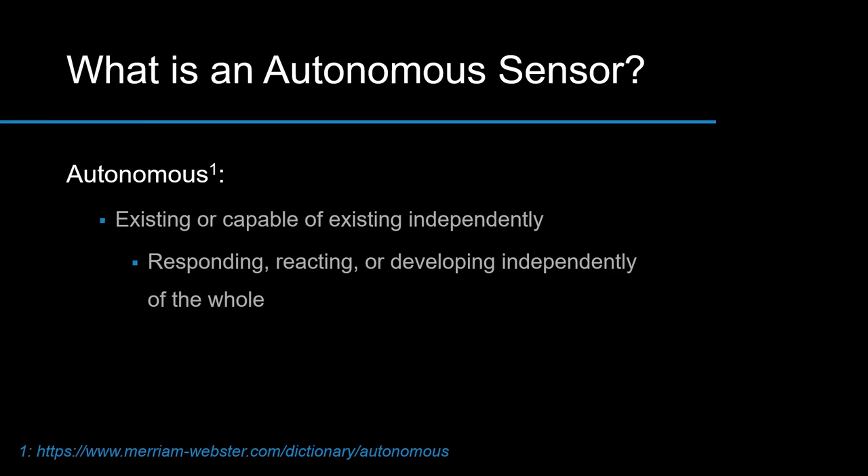Thanks, Antonio. Yes, so let's unpack that. Merriam-Webster describes autonomous as existing or capable of existing independently. So what does that really mean? It's the ability to have control over decision-making based on a variety of input factors. So you have the autonomy to decide, after you wake up, am I going to brush my teeth first or go eat breakfast first? Making simple decisions like that.

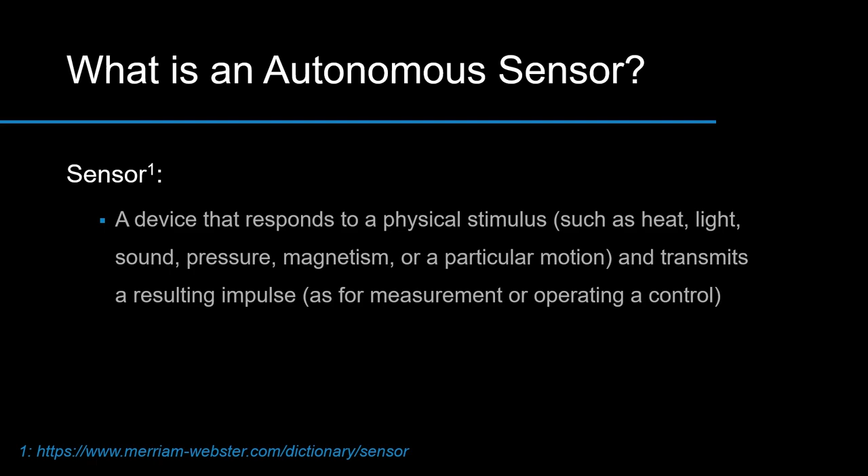Now, what is a sensor? Merriam-Webster defines that as a device that responds to a physical stimulus. So what is a physical stimulus? It can be any kind of input like heat, light, sound, pressure, and you can use sensors to pick up those things. Like my mic is picking up the sound of my voice. Your eyes are picking up the visible light around you. A thermometer senses change in temperature, things like that.

So what is an autonomous sensor? We define that in our group as a sensor that responds to physical stimulus and then can make a decision about what to do about that physical stimulus. That's how those two parts of autonomous sensor work together as a system.

So now we have an idea of what we mean by autonomous sensors. Another word for autonomous sensor is robotics, which you might be familiar with, or intelligent systems, or uncrewed systems. They're in our everyday life. Just real quick, how many of you came in in a Tesla? So you've been exposed to autonomous robotic technology already, with the self-driving, the driving assistance and autonomous driving capabilities.

And if you've been out to San Francisco lately, you've probably seen the Waymos driving almost completely autonomous. And if you've been on an airplane lately, some portion of that flight has been performed with autonomous technology, think of guided navigation, autopilot. The airline industry is even developing and testing autonomous takeoff and landings, so be on the lookout for that.

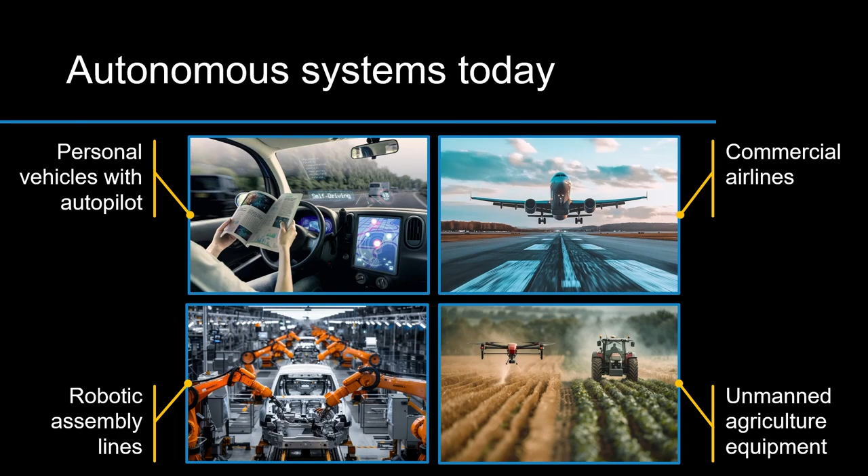But not all technology is the same. So for a more in-depth explanation, I'm going to turn it over to Brian. Thank you very much.

So we talked about what autonomous sensors are, how we define them, and gave you some examples of different types of systems that you interact with in your everyday life today. But why do we care? Why do we want to develop them? Why do we want to use them? That brings in the concept of the 3 Ds of autonomy. So the first D in the 3 Ds of autonomy is dangerous.

So these are tasks, pretty self-explanatory, that are dangerous for humans to do. The goal would be to increase the standoff from that dangerous item. So we can use drones remotely to go and look for things that might be dangerous for humans to be close to and interact with. We can even have them potentially interact with the dangerous item, again allowing the human to be much further away.

Another type is dirty, and this can range from all different types of stuff. This could literally be something that you're going to be in the dirt, so agriculture is a great example. Maybe you don't want to be in the field around dirt, or potentially dirty and dangerous things, like spraying fields. Pesticides and stuff have been known to potentially have effects on humans. So we can use autonomous systems and sensors to remove humans from having to interact regularly with something that is considered dirty and potentially dangerous.

And then the last one is dull. These are things that we don't want to do as humans, things that are just honestly annoying, which autonomy is great at replacing. Driving is a great example, as Antonio mentioned. Driving the car is not exactly a fun thing. Maybe some of you will be getting your driver's license soon, and it seems fun, but after about 10 years, you'll probably realize it's not all it's cracked up to be. So this is a task that we can easily replace, and you're seeing that today.

The way we're leveraging AI and teaming is that the 3 UAS actually have control algorithms in place that tell them to stay in this specific chevron formation, a V formation, and precede the vehicle at a set distance. So you can see as it makes the left-hand turn, the aerial vehicles are swinging around to stay that set distance in front of that ground vehicle.

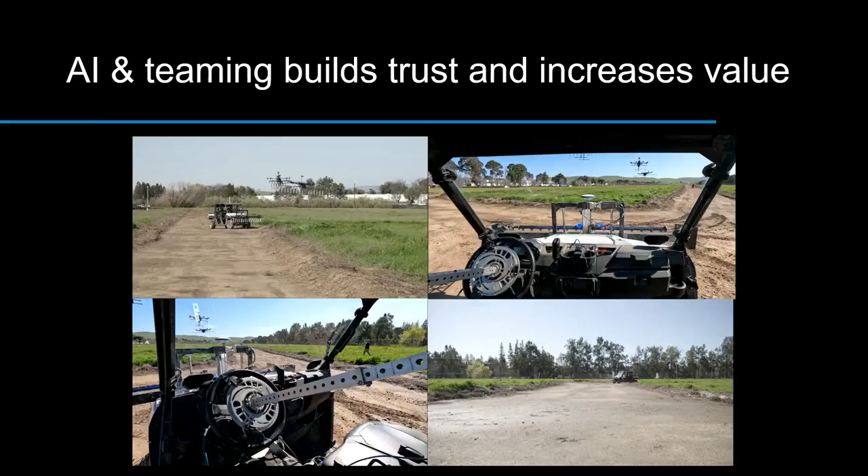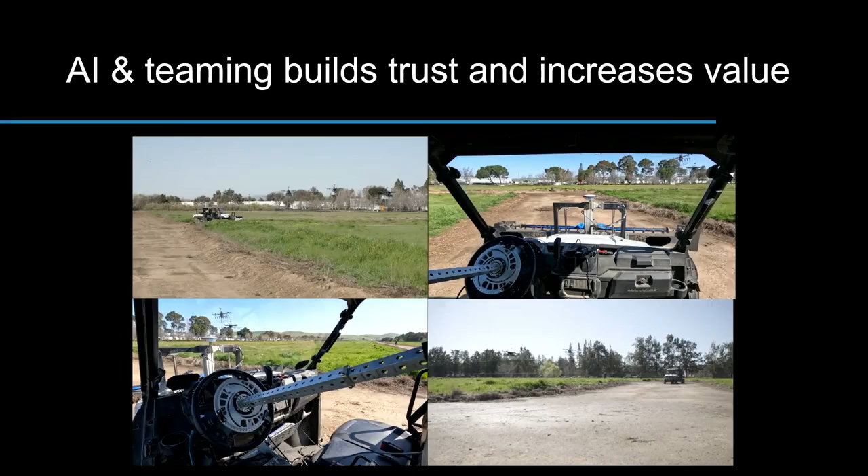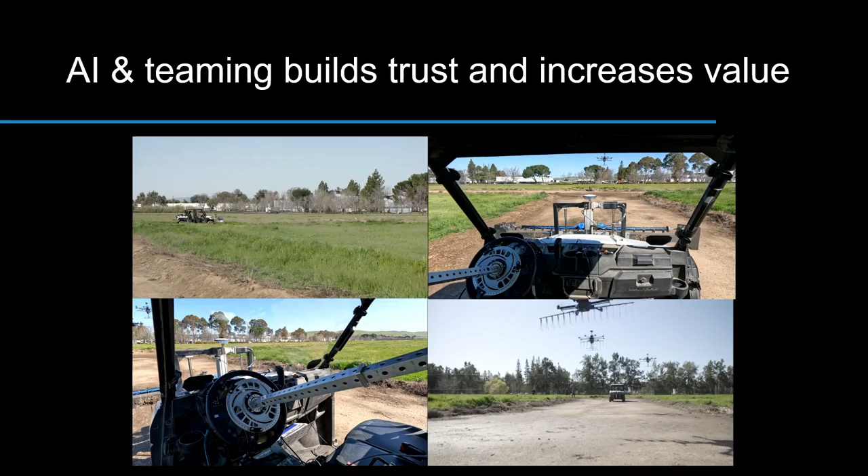Another fun thing about this ground vehicle: what's enabling an operator to have remote control of this vehicle is that we are mapping controls to the brake and the gas pedal, as well as the servo motor on the steering column, so that you have all the same functionality as an operator would that's in the vehicle, but with this safety standoff. So the value added here is that what would take 4 highly skilled operators now only requires 1 operator who is at a safe distance standoff. Hopefully that highlights the value added of AI and teaming.

Right, so now we've talked about what an autonomous system is. We've defined it, and we've talked about kind of the value of it. But now we'll shift onto the sensor side. So what are sensors, and how do they work?

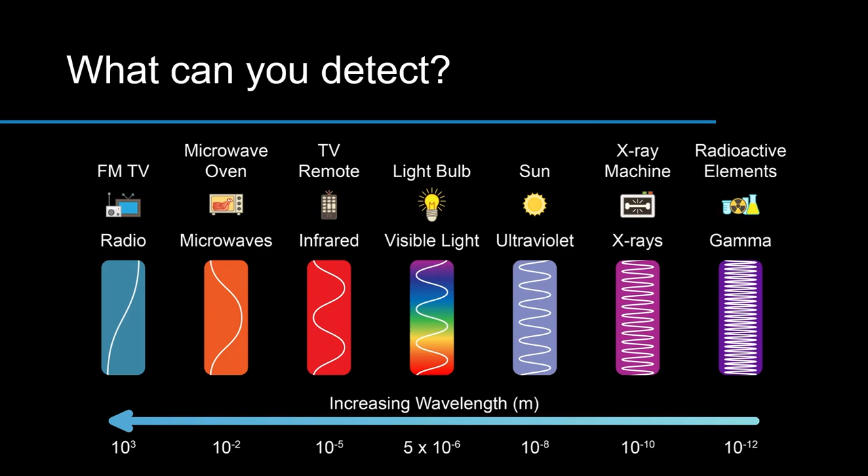And then as we push even higher frequency, we get into things like X-rays. So any of you guys have been injured, had a medical procedure, or had a broken bone are probably familiar. This is what they use to do medical imaging typically. And then you push even to higher frequencies, which have very specific use cases in the gamma band for nuclear type operations.

But focusing on visible light to really hit home how we use the spectrum, it's something you guys use every day, again, is your sight. So your eyes are sensors that are very sensitive to this band, denoted by wavelengths of 700 nanometers up to 400 nanometers. And that's how you perceive all the different colors of the rainbow, with red being a much lower frequency and violet being a higher frequency.

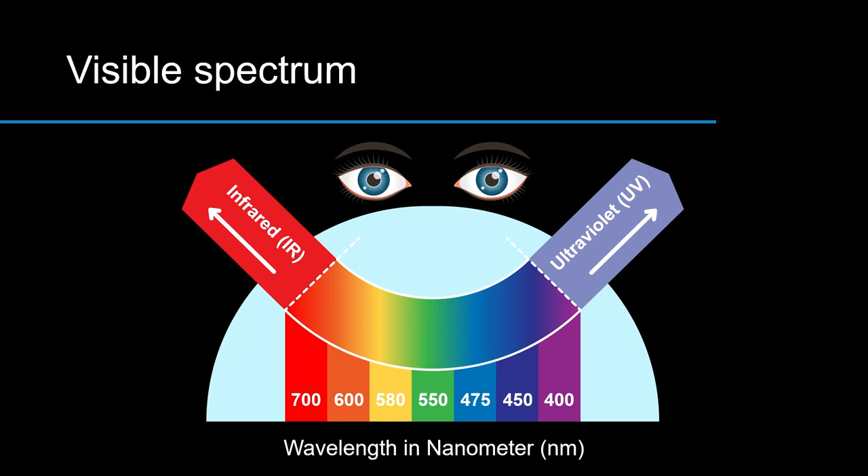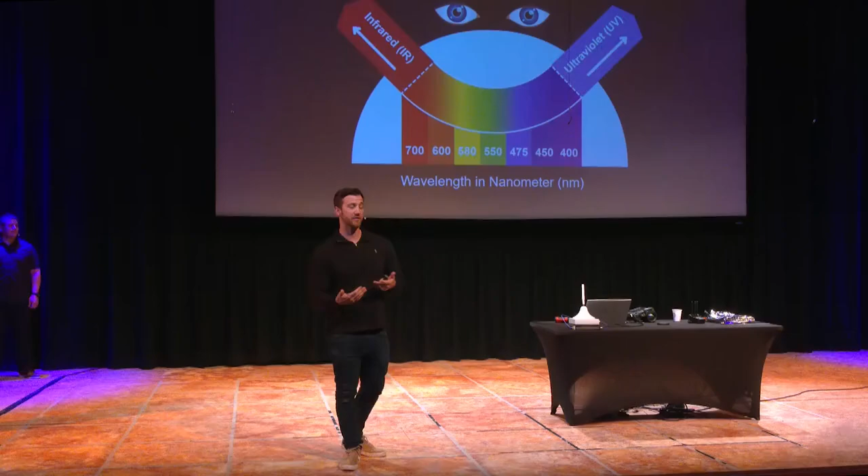And then your eyes and your brain, through being able to process this data, can start differentiating and understanding how different objects relate to these signals. So in addition to using shape to identify something, say a table, you also may say, that's a black table, right? You know a color. And you can start using that to identify things. And that's exactly what sensors are going to do - they use portions of the spectrum, and then they understand how they relate to certain objects we're looking for, and we develop the algorithms to do the detection on top of that.

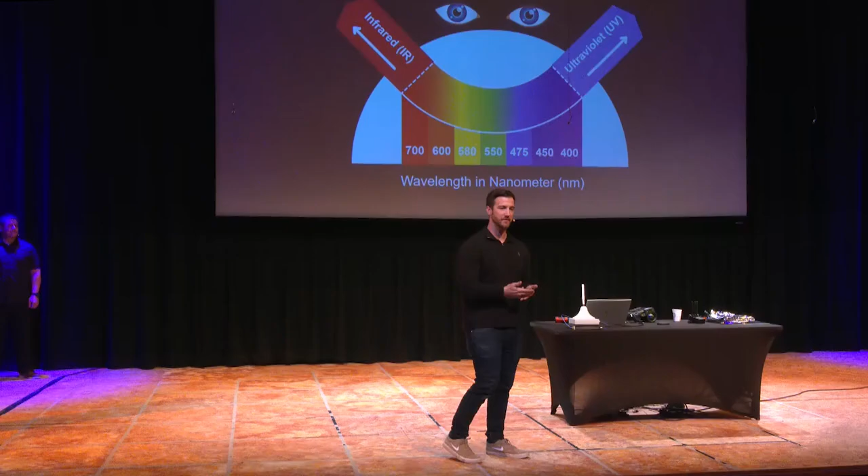And then we're going to talk a little bit more in depth as we show you a demo.

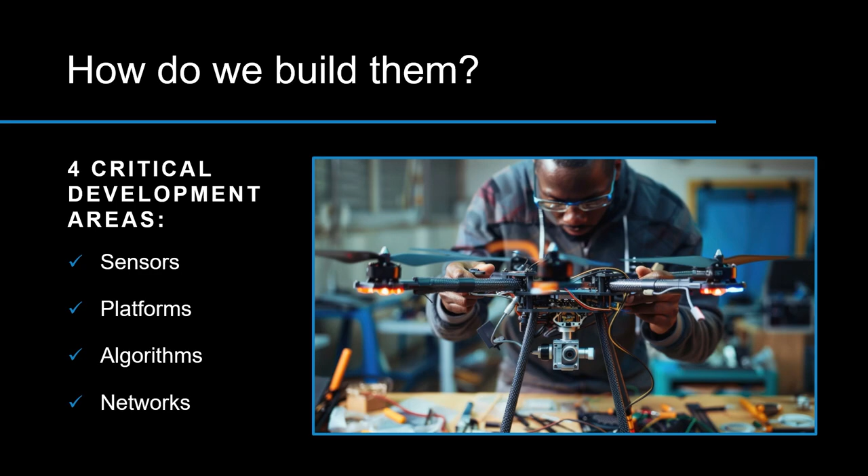Another major component of autonomous sensors is the algorithm and the processing. As the sensors pull in all this information, it's got to go somewhere. So it usually goes to a processing unit that takes that sensor information, runs it through algorithms, which are a specific set of instructions, and then from that it calculates what to do next with that information. That's how we get autonomy. And in this area, that's where AI, artificial intelligence, lives, per se.

Then another major component is networks. This is how drones communicate with each other and to a central point. Think about a single bee in a large swarm, how that one bee can take information, think, and process, and decide what to do next based off what its neighbors are doing. That's how they keep from running into each other.

And now we're going to give you a sneak peek at how we at the lab build these autonomous sensors. Here's a video that shows a little bit of what our day may look like.

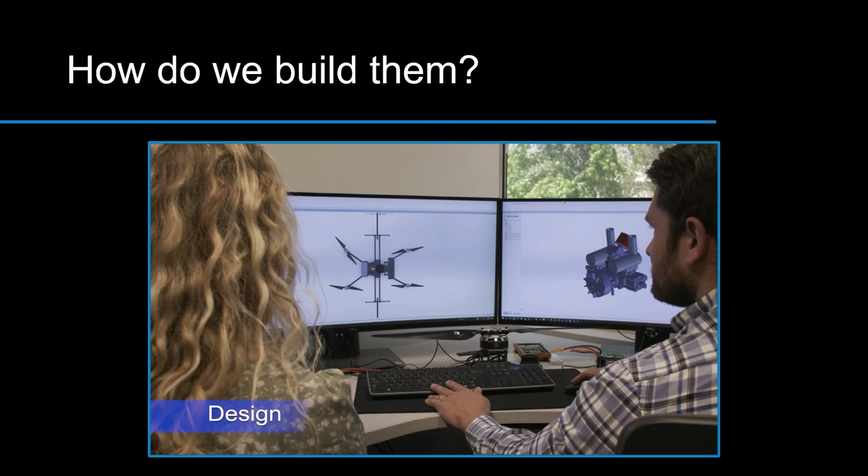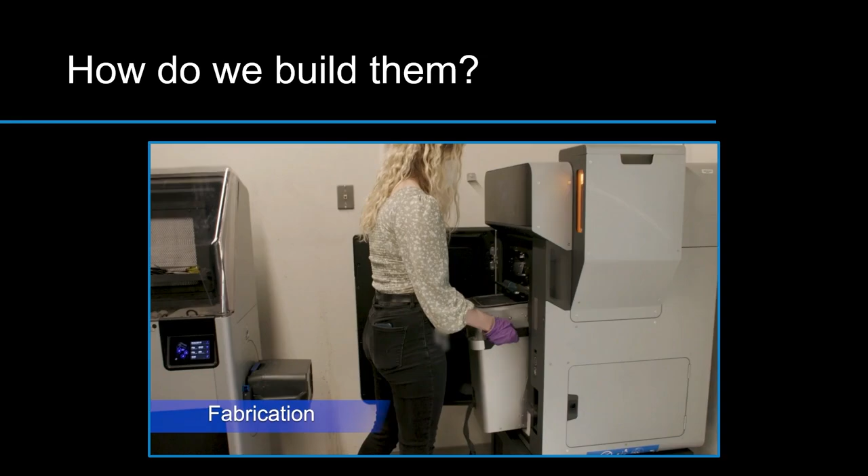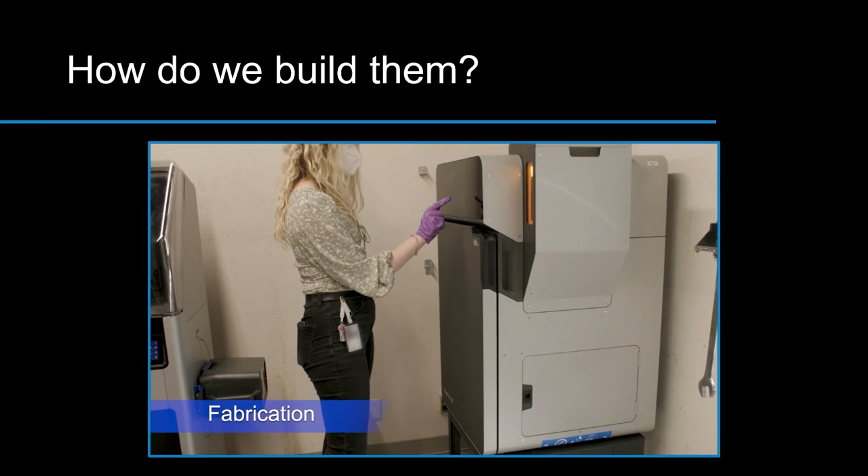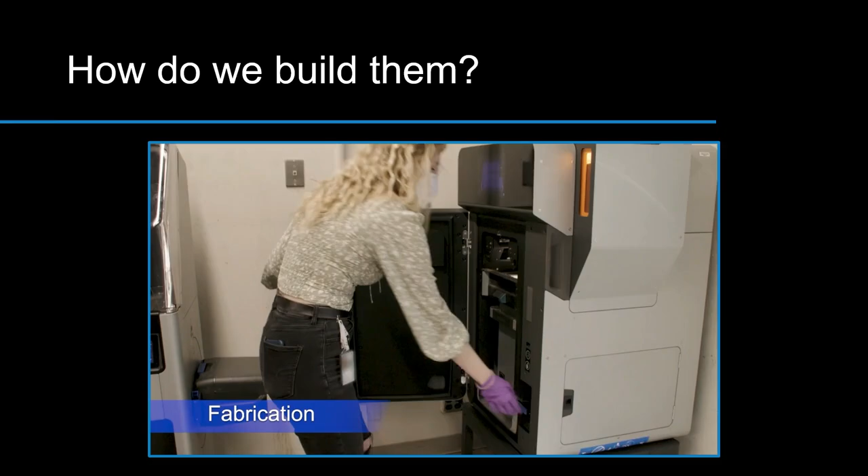Here I'm working with another mechanical engineer in our program area where we designed the UAS, the drone platform, for a specific sensor application. First we use computer-aided design software, CAD, as you saw in the first little clip. After that, we decide how we're going to manufacture it. Are we going to use traditional manufacturing techniques, or are we going to 3D print? Generally, it's a combination of a variety of different manufacturing techniques that go into creating one platform.

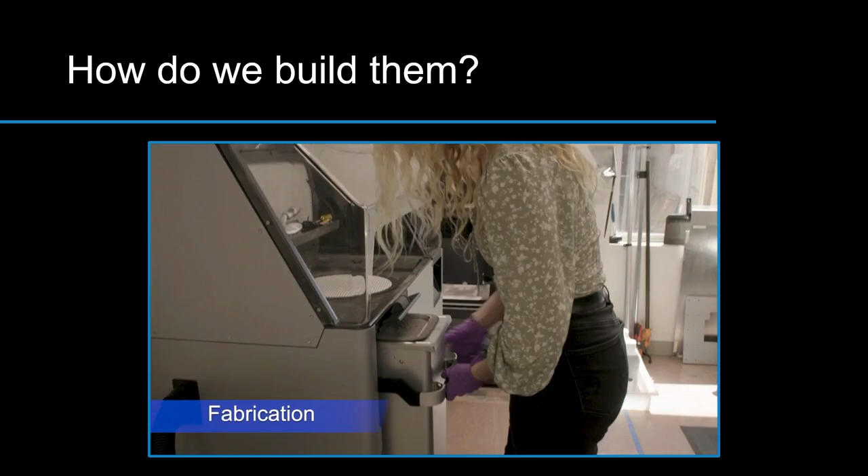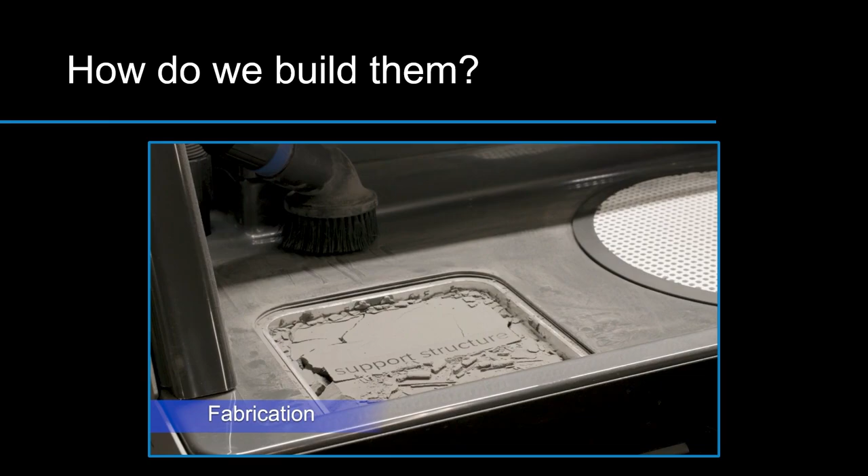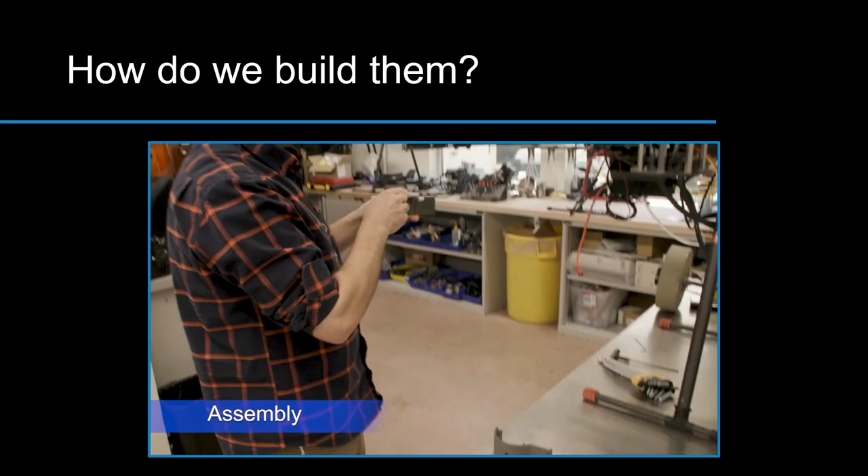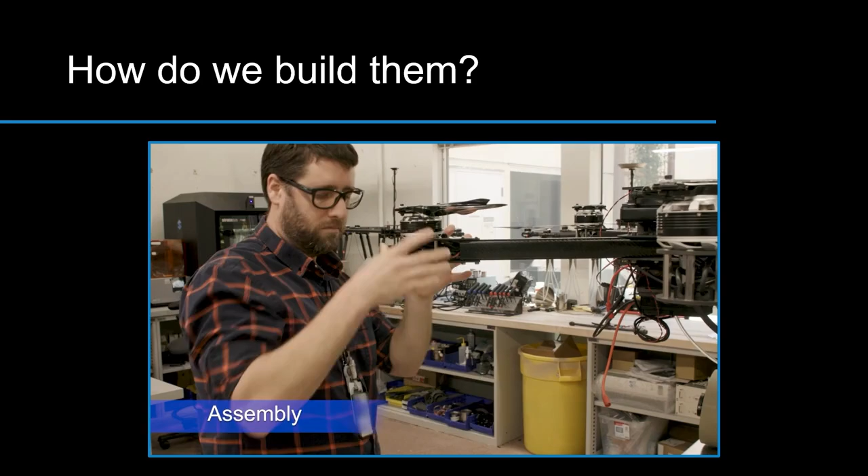Here I'm using a 3D printer to print some of the components. It might not look like the 3D printers you're imagining, because it's not a fused deposition modeling type of 3D printer. Those are the ones that extrude material—you can imagine how a hot glue gun works, squeezing out material and creating layers and layers to build up a part. This 3D printing technique is called selective laser sintering. There's just a variety of manufacturing techniques that we use.

Then we also move into the assembly and integration of parts, and Antonio can highlight some of that. Yeah, so the assembly—there's a lot of components to these drones, and it takes a diverse set of people with a diverse set of skills, such as, along with what Claire was saying, mechanical engineering, electrical engineering, computer science, data science, and networking. All those skills come together to contribute their components to build a larger system.

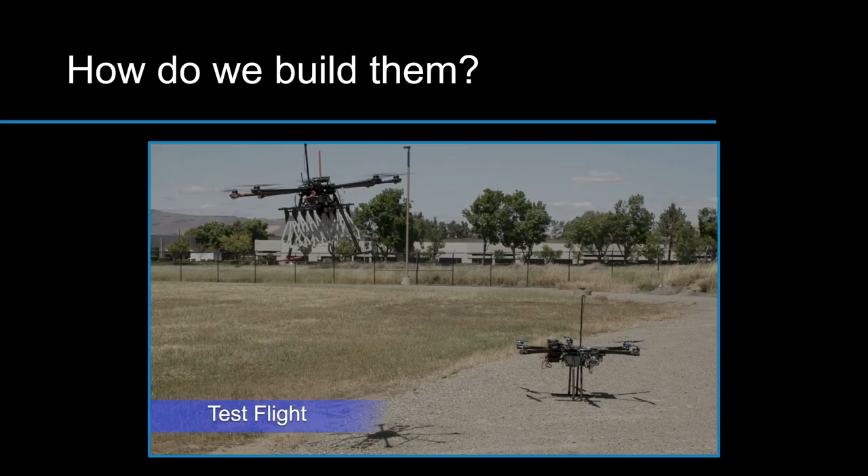Now, once all these components come together, we've got to find a way to make sure that all these components mesh and work together seamlessly. So you've got to test them. We are capable of field testing our entire systems. Here is an example of our outdoor testing lab, where we can take the systems we built and fly them in a real-world environment and collect data as well.

Okay, the video ended, but you saw there how it was going down that lane. At the same time it's going down the lane, it's collecting information that then gets sent to the machine learning portion of the system. And Brian's going to talk more on that.

Now you know what they are, you know how we build them, but again, what do we use them for? What does Lawrence Livermore do with these autonomous sensors and systems? We're going to talk about a couple different mission areas that we're currently working on and also getting more involved in. The first one is explosive hazard detection.

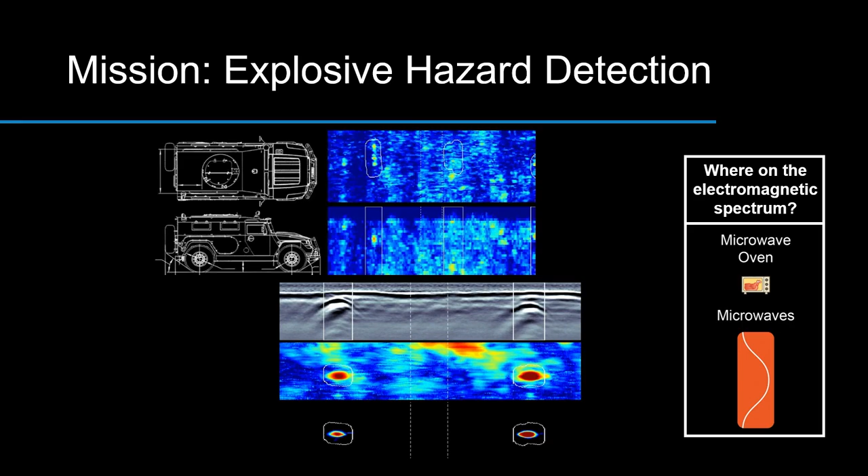You can keep it, yeah. I'll talk about the next mission area, which is airfield or runway damage assessment.

So you can imagine whether there is intentional damage done to a runway or just degradation due to weather or other environmental factors, you want to ensure that you have a safe place for aircraft takeoff and landing.

And so one way to observe damage is in the visible spectrum, right? You can see it with your eyes, you can see it with cameras. In this example, you can see that there's a crater underneath this drone, so that's a pretty obvious indication that you would want to avoid that space in a runway or send someone to repair it for a safe takeoff and landing.

But what about those instances where you can't see damage? Maybe the subsurface under the runway, the rebar is damaged, or there are some voids, some air pockets, and things like that. Something you can't see with the naked eye, but wouldn't support an aircraft takeoff or landing. You have to use a variety of other sensors to detect things like this.

So one of those sensors could be a ground-penetrating radar, like Brian just mentioned. That's a great application to see subsurface disturbance.

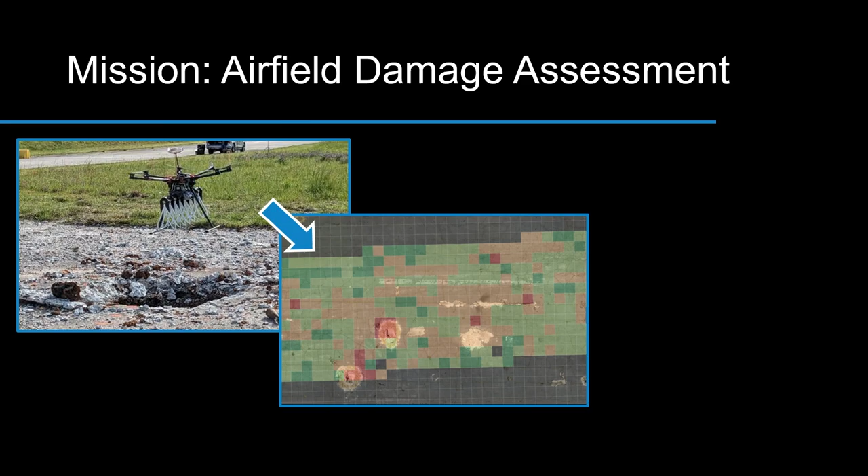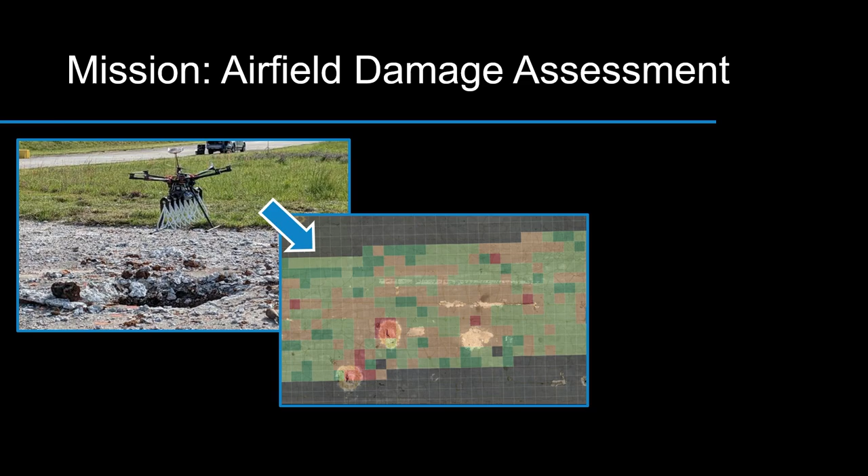After you use a variety of sensors to detect what could be damage or areas that you want to avoid, you can combine different sensor data into something like a heat map that would be using autonomy to inform a user of safe or dangerous spaces in a runway. One way to do that is create a heat map, like you can see on the screen, showing very obviously, not taking a lot of decision making for a human to say, I'm going to avoid those red areas.

Those were either visibly noted as being dangerous or destroyed, or not visibly, whether it was with radar or something else. And then those green areas are safe for aircraft takeoff and landing. So it can create a picture combining all of these different sensors to inform the user, requiring very little brain power for the operator.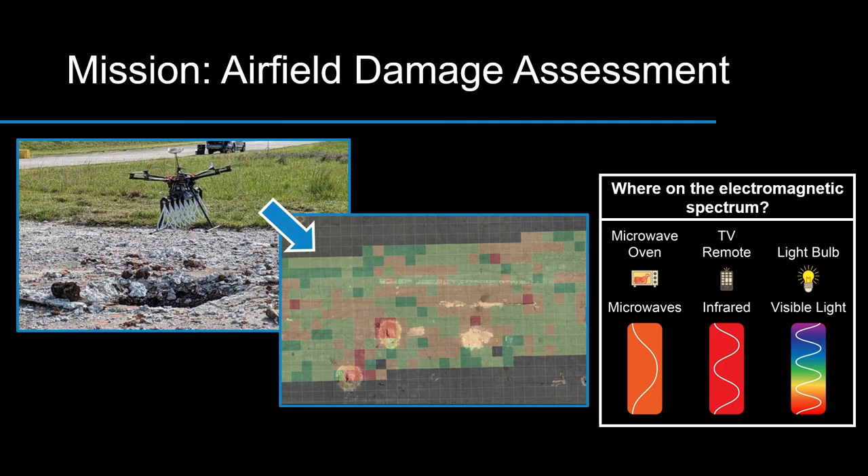And again, you can use a variety of sensors, like the radar falls in the microwaves. You can use infrared falling in that next section of the electromagnetic spectrum, as well as visible light in normal cameras. So that just highlights what sensor range you can use to apply to a mission space like that.

So another area that we're going to talk about, I mentioned a little bit earlier, but the mission area of site security. Again, these are cases where you have an area you want to protect. You may have a fence line. You can think of maybe some facilities where you see security guards walking around it. We typically focus on much larger sites that the government typically uses where security is a must.

But we go a step further again, because detecting, say, a generator and truck is very valuable. It's not requiring someone to walk around and constantly look for these things. It can, again, alert if it sees these objects. But then we can also group together what objects it's seeing in one scene and get an idea of what type of activity is going on.

So I just mentioned you may look at this and, again, see a work truck and a generator and say construction activity. We can have algorithms that automatically do that. And again, instead of just alerting certain objects, we can actually alert you of specific activities we think are going on. And again, that just adds more value to the system.

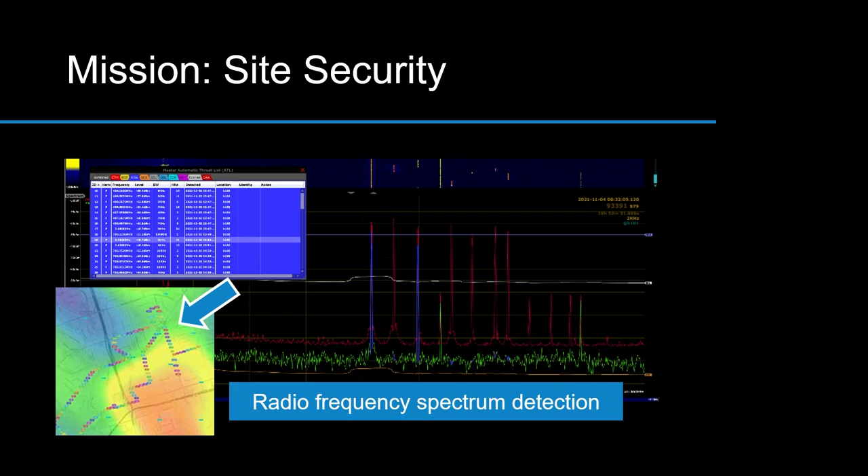This basically focuses on the FM radio, TV radio area, but also a little bit into the microwave. So we are going to demonstrate to you guys what a spectrum analyzer does and what you can use it for. I'm going to bring out Roger again.

Okay, so just as you saw on the picture we had, this is a spectrum analyzer. From left to right, you're seeing the live spectrum of what's going on in this facility. This is covering roughly 11 megahertz to 6 gigahertz. As I talk about the electromagnetic spectrum, that's covering radio all the way up to the microwave area.

So you can actually see right now, there's a lot of you guys in here, and some of you probably didn't turn your cell phones off, and we can see that. All that little noise on the left-hand side is typically associated with cell phone traffic. Wi-Fi will be in the higher area to the right, where we get into 5 gigahertz and 2.4 gigahertz.

Roger has a handheld radio that's at a low frequency, so when he chirps it, you're actually going to see it says overload, and you see a big band. Go ahead and let go, and then go back up. See that big peak that's showing? Yeah, that's detecting the radio. So if you were looking for handheld radio traffic, people doing long-range comms that they don't want you to detect because it's not over a cell phone, it's a little harder to see, you could still see the radio traffic with the spectrum analyzer.

Now the other thing you can do is something like Wi-Fi. On this side here, move my cursor, you see one peak, that's probably related to Wi-Fi, since there's a lot of devices going on. But if I take my cell phone, which is connected to the Wi-Fi, and start some traffic going across it, you'll see in time a much bigger peak starting to show up between those two, on the right side near my cursor. So that's my cell phone traffic going.

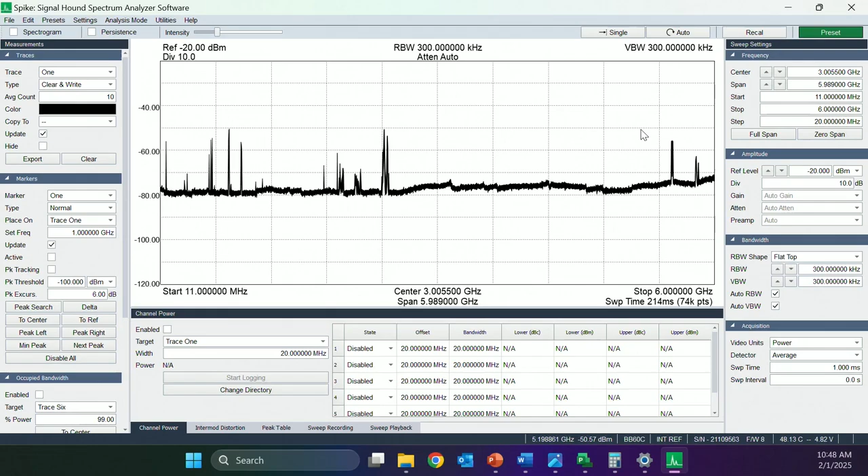So again, we can use devices like spectrum analyzers to see not only if there are communications going on, but also different types. All right, I'm going to discuss another mission space, thank you,

in an area that is more tied to environmental research and keeping our planet green. This mission space is centered around orphaned natural gas wells, meaning wells that have been abandoned, forgotten about, are no longer used, but still may be leaking methane gas into the atmosphere.

You can imagine the need that if these are leaking hundreds of grams, kilograms of methane into the atmosphere, that we would want to go and cap them so they're no longer leaking, right? The undocumented portion of this is interesting because decades ago, people placing natural gas wells may not have noted exactly where they are, or those documents may have been lost.

So to find these natural gas wells, you need to use a variety of sensors. The alternative would be that humans just go and walk across large expanses of the country in search of these, and that would fall pretty heavily into the dull category of why we would want to use autonomy. So you can multiply your force by using autonomy and different kinds of vehicles equipped with different sensors to pinpoint specific areas that you want to deeply investigate.

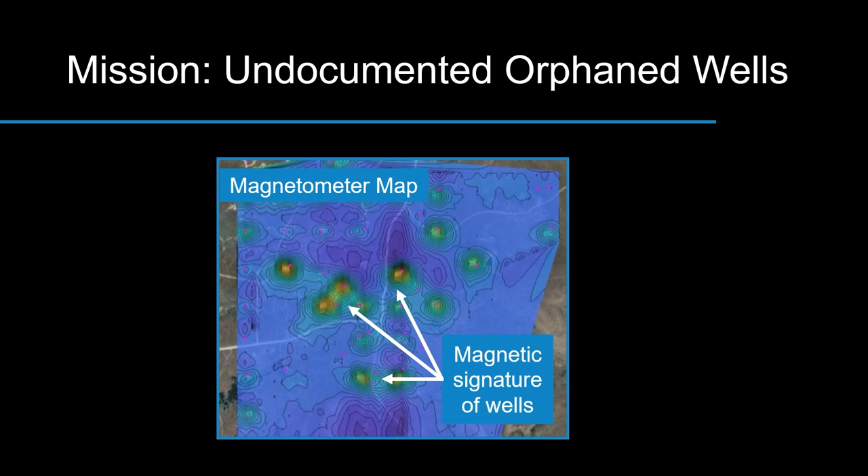I'll make a quick caveat that a magnetometer does not fall specifically in the electromagnetic spectrum. Magnetism is a property of electromagnetic waves, but it's still really valuable as a sensor that can be combined with other sensor data in the electromagnetic spectrum.

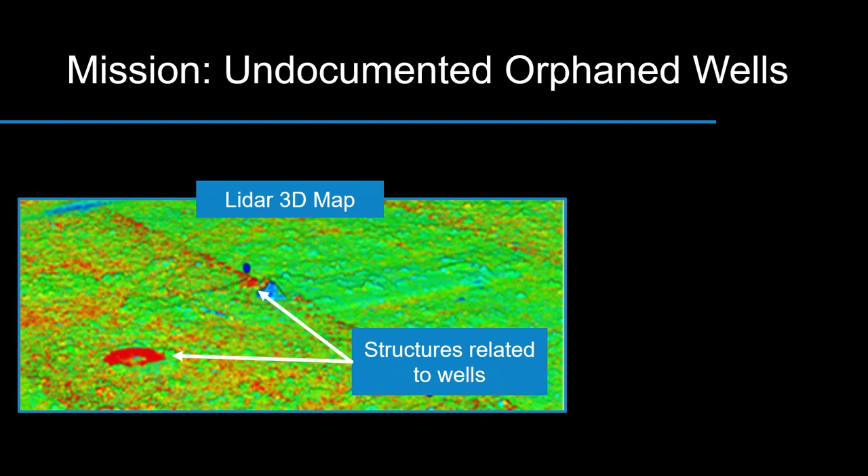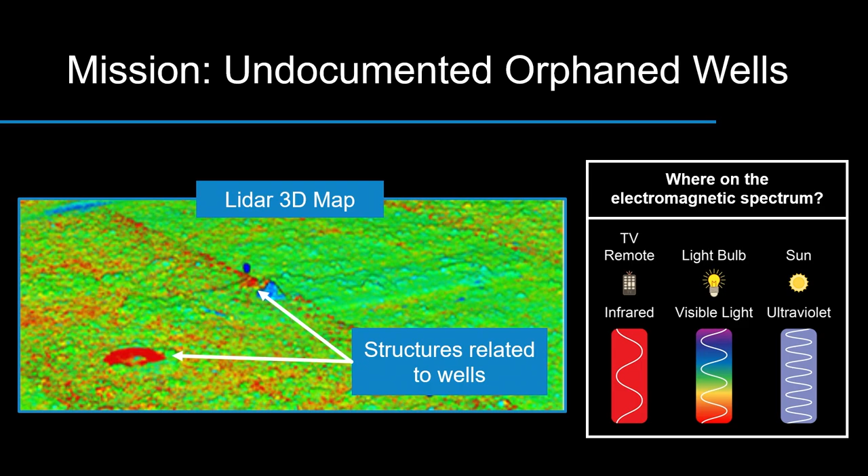Other sensors that may be used to inform the user of what you're detecting are LiDAR sensors, which fall in a range in the electromagnetic spectrum. You can use them by essentially topo mapping the surface using topography, showing change in elevation. So you can imagine a big oil derrick sitting on top of an orphaned well would show up differently than just a pipe sticking out of the ground.

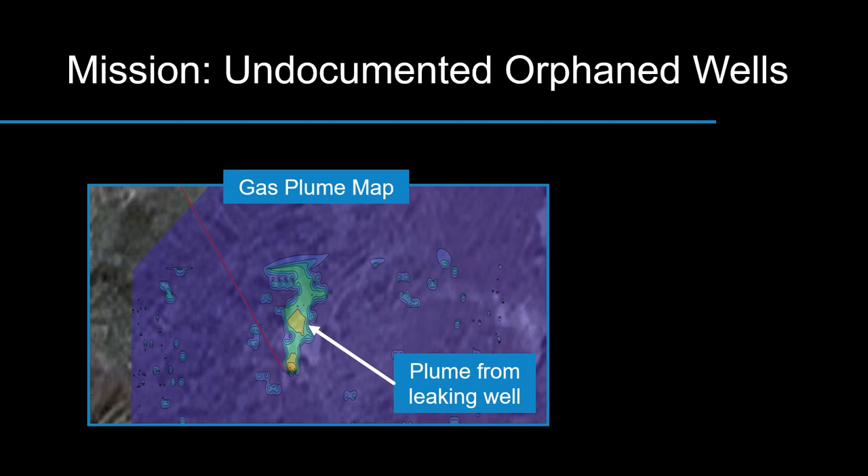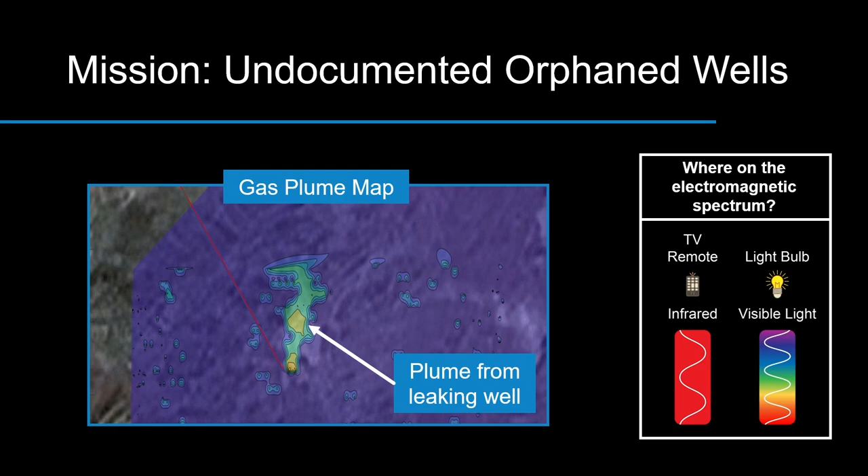Finally, once you narrow down to specific locations you want to investigate further, you can use methane gas detection sensors that use different wavelengths to identify if methane gas is being leaked into the atmosphere. So you can use a combination of different sensors to give you a very informed decision as to whether A, you've found an orphaned natural gas well, B, if it's leaking into the atmosphere, and C, how to cap it and prevent it from continuing to leak.

So the last mission area we're going to talk about is wildfires. This is perhaps good timing because, as you guys may see in the news, there's a lot of devastation happening with wildfires in Southern California. This plagues our state very heavily in the last decade, but we're also seeing it across the world—a few years ago Australia dealt with very large bushfires, and that's becoming part of their reality as well. It's obviously a huge problem, and one that's ripe for autonomous sensors to be applied to.

If you're local to the area, you may remember late this last summer we had a fire that started between Livermore and Tracy in the hills, where part of Livermore Site 300 is. It burned quite a bit of acreage, including some of our facility area. Our team was actually called upon to take some of our sensing technology out there to help with the post-fire response.

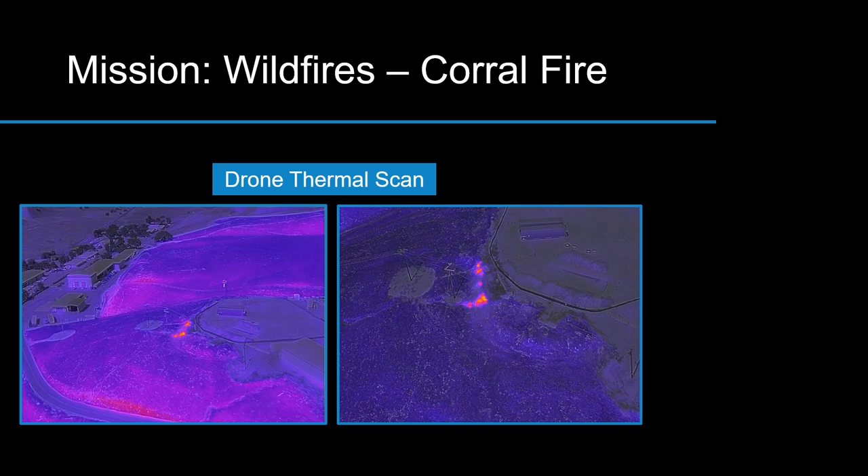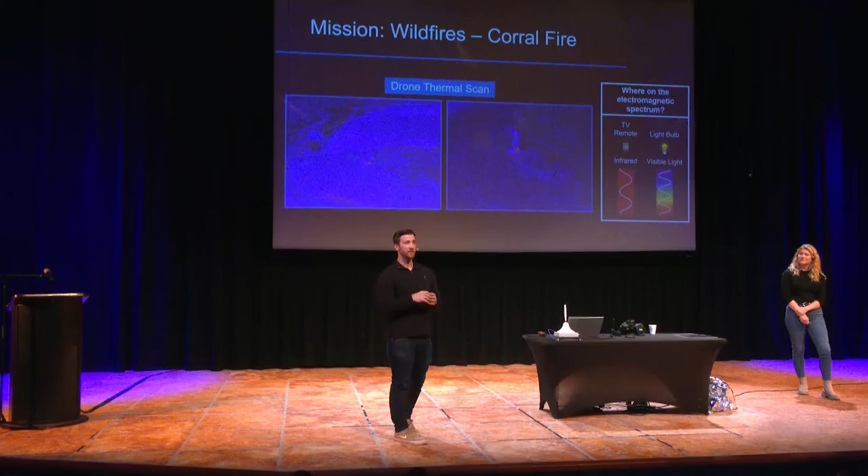One of the main things we looked for was what we call hotspots. Hotspots with fires are areas where the fire previously burned and was put out, or areas that didn't burn that we didn't think burnt, but might still have a very hot spot that could cause fires later on. These are such a threat because they're very difficult to see, but pose a huge risk—when there are high winds, which typically occur during a fire, they can blow embers that cause fires for miles away and restart fires.

So what you actually see on the screen here is us flying some of our thermal technology, like the IR camera we showed you, using cameras to detect these hotspots. You can see very clearly that they pop up, just as you saw your faces in the crowd.

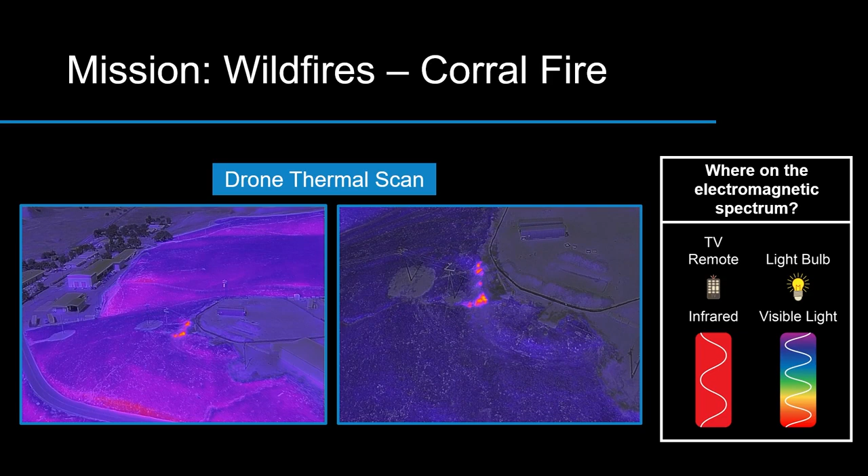Now if we go to the next slide, you'll see when we went up for visual confirmation on the left, it's very difficult to see these with the human eye or a simple camera. In this case it was under the ground and wasn't exposed much until the wind blew, kicking off a bunch of embers which could cause huge problems. Basically the damage is already done.

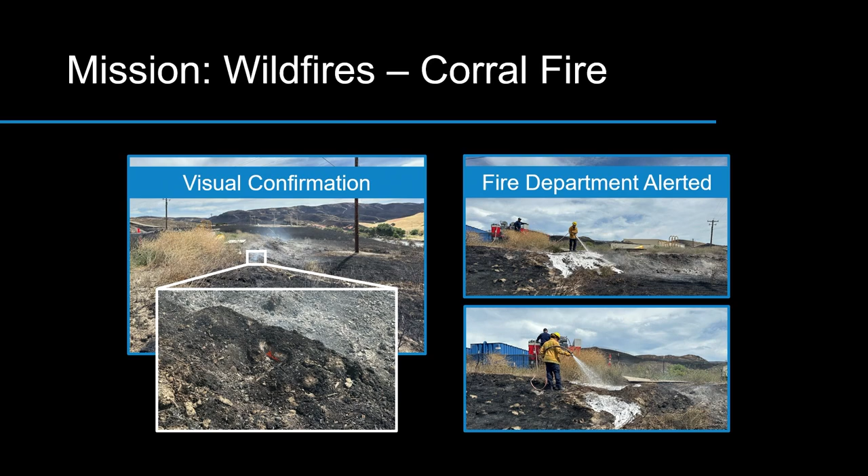In the previous image, the thermal camera picked that up very brightly, and we were actually able to communicate with the local fire department to put that out, because it's considered a very serious threat for restarting fires. This is huge for California, for the nation, and even broader, and it's something we're getting more involved in.

So now we are going to do a drone demo. I believe Antonio can hear us. He snuck away, and he's going to be flying a drone, and we should be seeing the live feed come on the screen. We'll give that a second.

So due to the weather, unfortunately we're not going to be flying around campus. There's our pilot. So he'll just be flying in the atrium.

So there's a camera view on this drone. As you can see, he takes off. A couple different things going on. We're all excited to see. I'm invested myself as a viewer.

So in addition to all the sensor integration and applications that Brian and I have been talking about, we do design and develop the platforms for these sensors in-house at the lab. This is just a little tiny drone compared to the ones you've seen in the pictures of some of our other work.

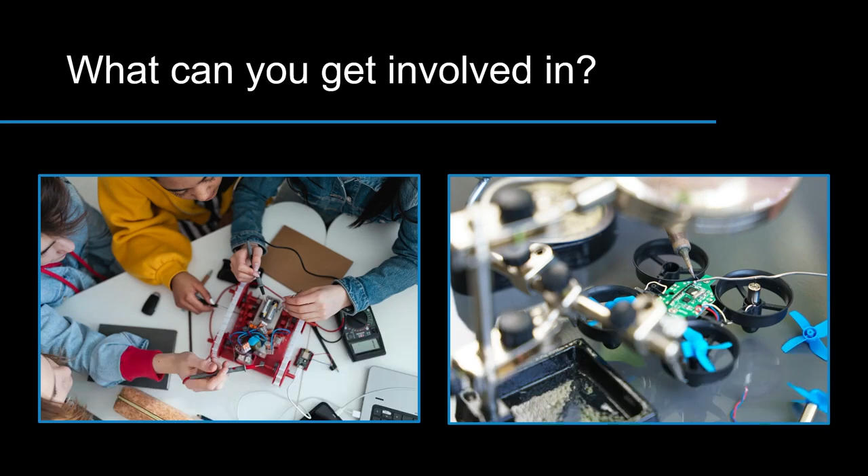So if you are thinking that looks like a great career or really cool thing to do, and wondering how to get from where you are now in school to there and into their jobs, make sure you're taking some math classes, and if there's a physics class available to you. Also look at getting involved in other activities - if your school has a robotics program, whether it's FIRST or VEX or other kinds, or if there are engineering classes, programming clubs, all of these will help move you along so you can find yourself flying drones for a profession too. So yeah, thank you guys.